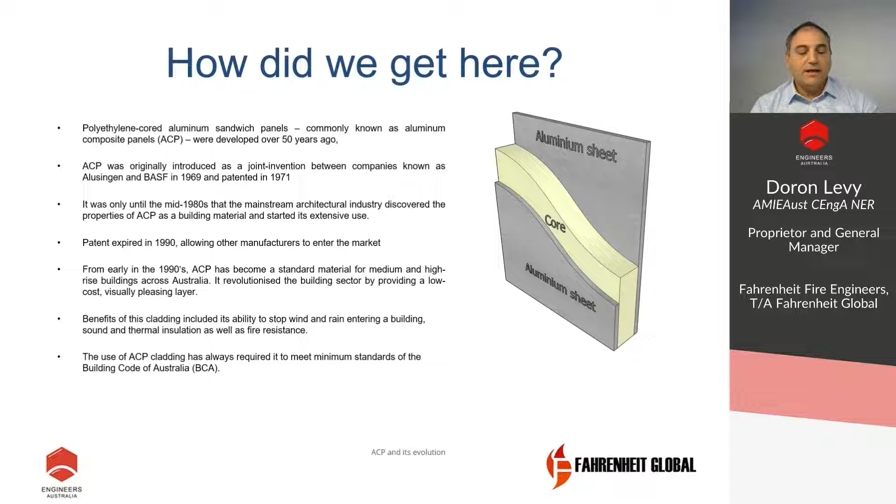It revolutionized the building sector by providing a low-cost, aesthetically pleasing skin or layer that was easy to attach to a building framework. Benefits of this cladding include its ability to stop rain entering a building, sound and thermal insulation, as well as fire resistance.

How did we get here? Aided by changes to the Building Code of Australia by way of the introduction of performance requirements, replacing a blanket ban on combustible materials being used on tall building facades. The timing of the relaxation of the Building Code and the introduction of ACP to the Australian market by multinational companies could be a coincidence.

However, as outlined in my introduction, by the end of the 1990s, there was growing evidence that the performance-based approach to facade engineering was not working. Combustible core sandwich panels were implicated as contributors to serious injuries and deaths.

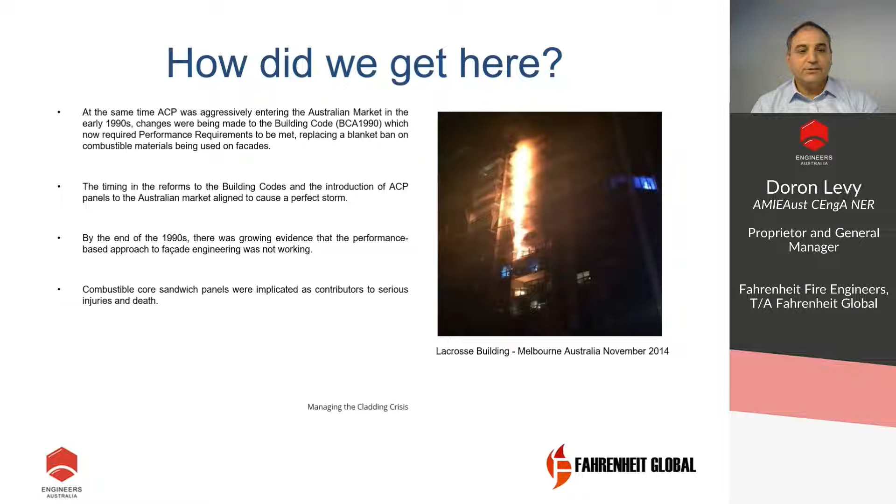In the aftermath of the scores of flammable cladded building fires from around the world, questions are now being asked regarding the viability of cladding and the potential impact across Australia, given a significant increase in multi-dwelling developments. In response, on September 6, 2017, the Australian Senate Economics References Committee released its interim report on aluminium composite cladding, which included the following 8 recommendations.

1. The Australian Government implement a total ban on the importation, sale and use of polyethylene core aluminium composite panels as a matter of urgency. 2. The Commonwealth Government work with state and territory governments to establish a national licensing scheme with requirements for continued professional development for all building practitioners. 3. The Building Ministers Forum give further consideration to introducing nationally consistent measures to increase accountability for participants across the supply chain. 4. That the Commonwealth Government consider making all Australian standards and codes freely available.

5. The Commonwealth Government consider imposing a penalty regime for non-compliance with the NCC, such as revocation of accreditation or a ban from tendering for Commonwealth-funded construction work, with substantial financial penalties. 6. The Commonwealth Government ensure that the Federal Safety Commissioner is adequately resourced to ensure the office is able to carry out its duties, in line with the new audit function and projected workflow.

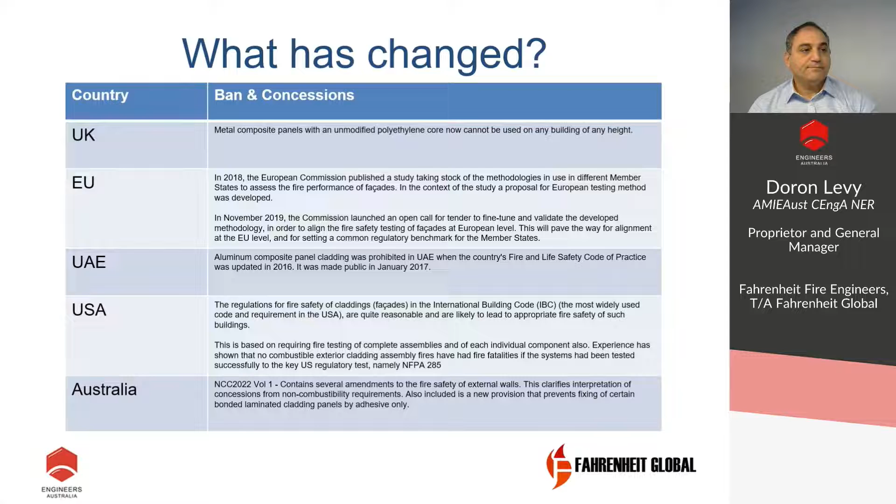The NCC 2022. This will be discussed in greater detail in the next presentation by Cathy Inglis. So stay tuned for that one. It'll be interesting. States and territories agreed to delay the adoption of the National Construction Code, the NCC, BCA 2022, until 1st of September 2022.

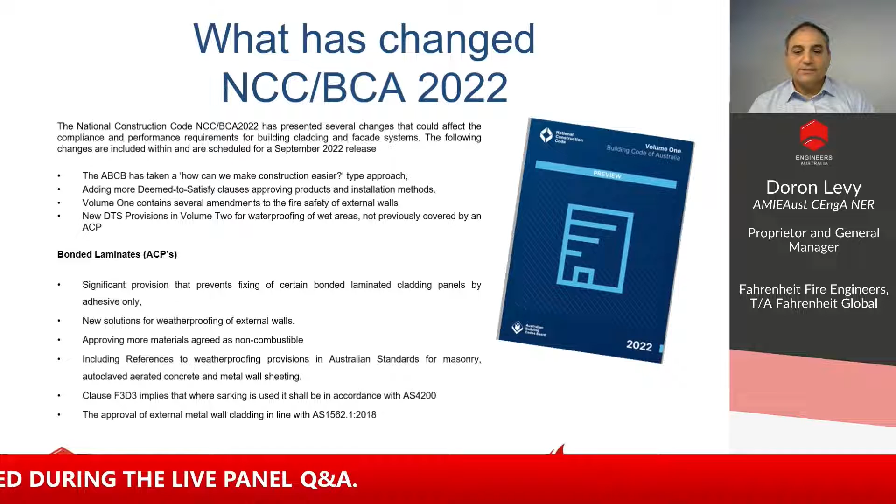Fire safety of external walls. Volume 1 contains several amendments to the fire safety of external walls. This clarifies interpretation of concessions for non-combustibility requirements. A new provision that prevents fixing of certain bonded laminated cladding panels by adhesive only. Waterproofing. The new DTS provision in Volume 2 for waterproofing of wet areas, not previously covered by the ACP.

Weatherproofing. Volume 1 contains additional DTS provisions providing new solutions for weatherproofing of external walls, including references to weatherproofing provisions in Australian standards for masonry, autoclaved aerated concrete, and metal wall sheeting. To the best of my knowledge, the 2022 version of the National Construction Code has presented numerous changes that could affect the compliance and performance requirements for building cladding and facade systems, as well as other construction materials and methods.

In reviewing the draft NCC 1, I note that the Australian Building Code Board have taken a how-we-can-make-construction-easier type approach by significantly adding more deemed-to-satisfy clauses, approving products and installation methods. Unlike previous codes, which were ultimately based on performance-based solutions to meet the performance requirements. For sarking, for instance, the change to clause F3D3 implies that where sarking is used, it shall be used in accordance with AS 4200.

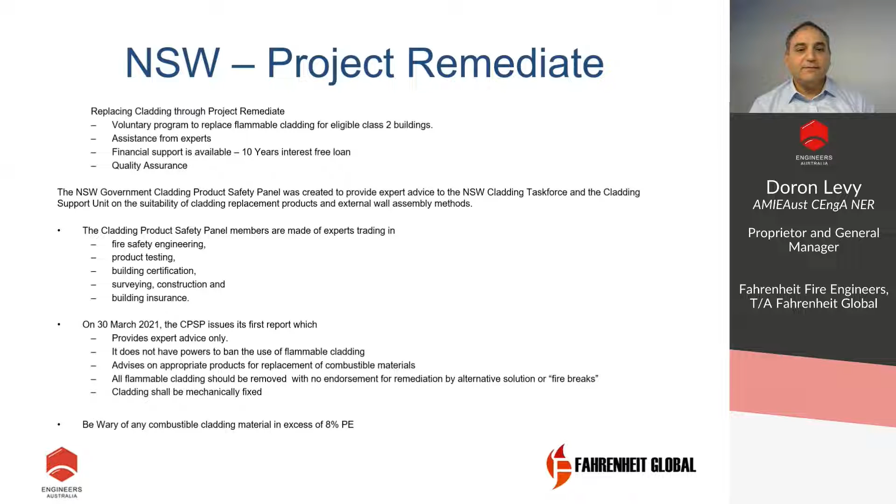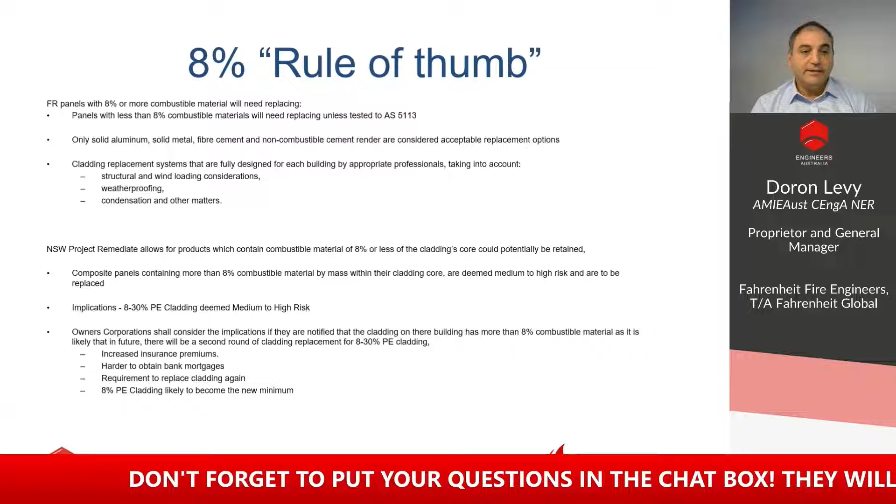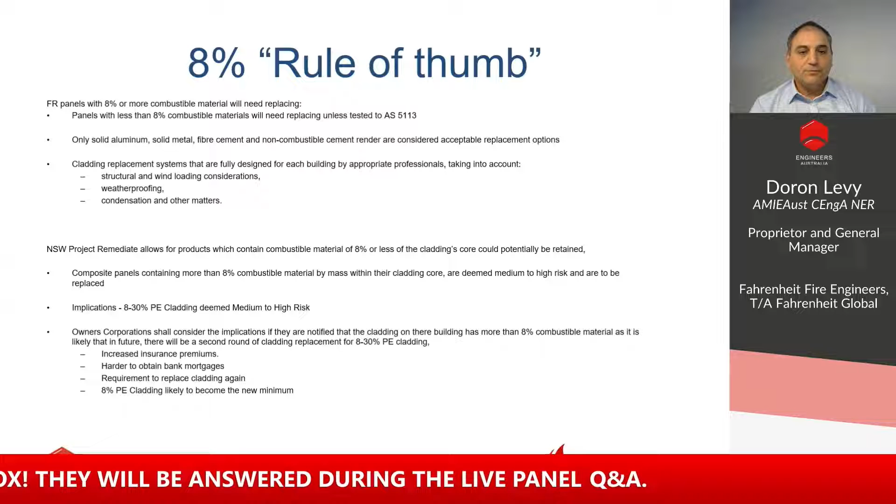The 8% rule of thumb. Composite panels containing more than 8% combustible materials by mass within their cladding core, such as polyethylene, PE, core, are deemed medium to high risk and need to be replaced. FR panels with 8% or more combustible material will need replacing. Currently, the New South Wales product ban is only applicable to panels with combustible material of 30% or greater.

It is likely that in the future there will be a second run of cladding replacement for 8 to 30% PE cladding. Therefore, owners corporations with such cladding may need to make financial provisions for its replacement. Owners corporations with 8 to 30% PE cladding are likely to be slugged with increased insurance premiums and possibly even difficulties obtaining insurance coverage, due to the Insurance Council of Australia deeming such cladding medium to high risk.

Potential buyers of such apartments with cladding of 8 to 30% PE may be unable to obtain bank mortgages for such purchases, creating a problem for existing lot owners who are looking to be able to sell. Owners corporations that have already replaced extremely flammable PE cladding with cladding between 8 to 30% PE, as such claddings are not a banned product under the Building Products Safety Act 2017, may need to again replace the cladding and may look at potential claims against building professionals that advised on the replacement cladding.

Any building professionals who are advising on or undertaking cladding replacement should be aware that 8% is likely to become the new minimum PE percentage for cladding in the future. Only solid aluminium, solid metal, fibre cement, and non-combustible cement render are considered acceptable replacement options, subject to bespoke design requirements. Panels with less than 8% combustible materials will need replacing unless tested to AS 5113.

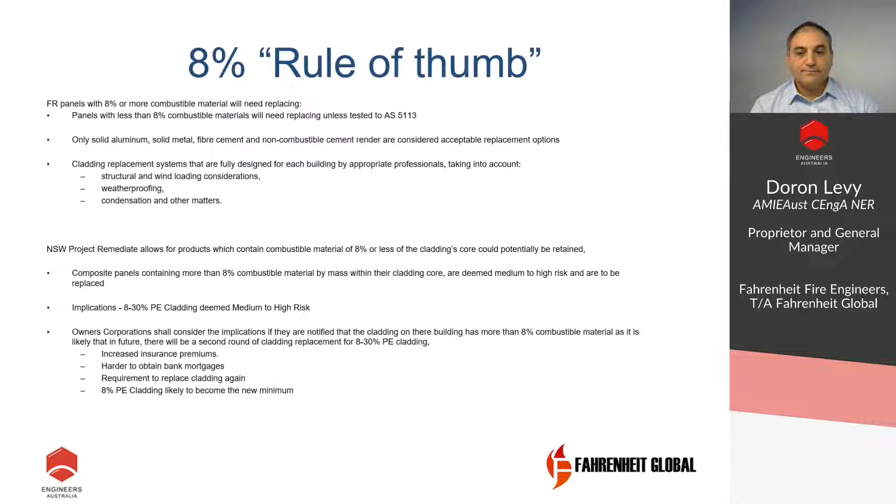What has changed in Victoria? A ban on cladding deemed by the Victorian government to be high risk came into force in February 2021 in a bid to reduce high fire hazards. Multi-storey developments will not be able to use flammable aluminium composite panels or rendered expanded polystyrene. Penalties of $80,000 will apply to individuals and up to $400,000 for building companies.

Victoria's Housing Minister wants a national approach to the issue of combustible cladding. Victoria's Minister for Planning announced at the time that flammable aluminium composite panels and rendered expanded polystyrene would be banned for use as external wall cladding for all multi-storey developments in the future. This ban will ensure new developments are built to the highest standard to keep Victorians safe, he said.

The prohibited materials will not be allowed for use on apartment buildings, hotels, aged care facilities, and other residential buildings with 2 or more stories. The ban also applies to office buildings, retail premises such as shopping centres, warehouses, factories, and car parks with 3 or more stories. ACP can be used if they have a core of more than 93% inert mineral filler, the 8% rule.

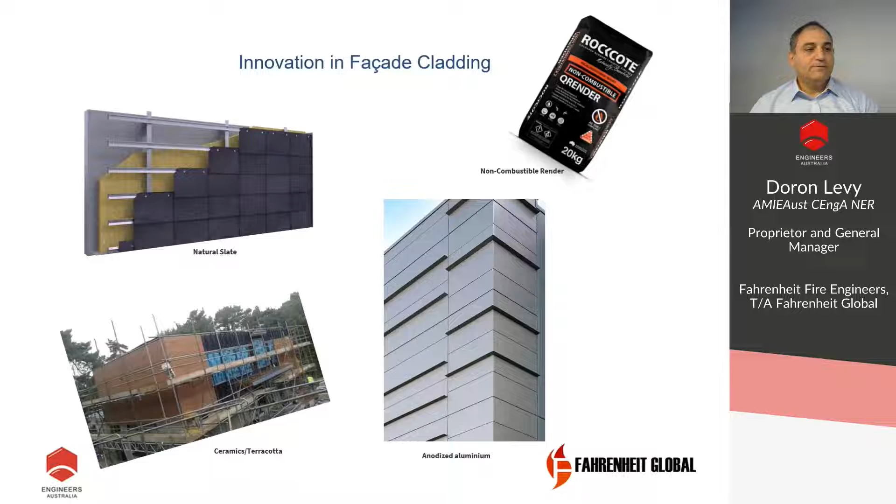Obviously, there's a lot more information on this topic on the EEA website, which I recommend looking into. It goes into details of cladding remediation Part A and Part B of Project Remediate.

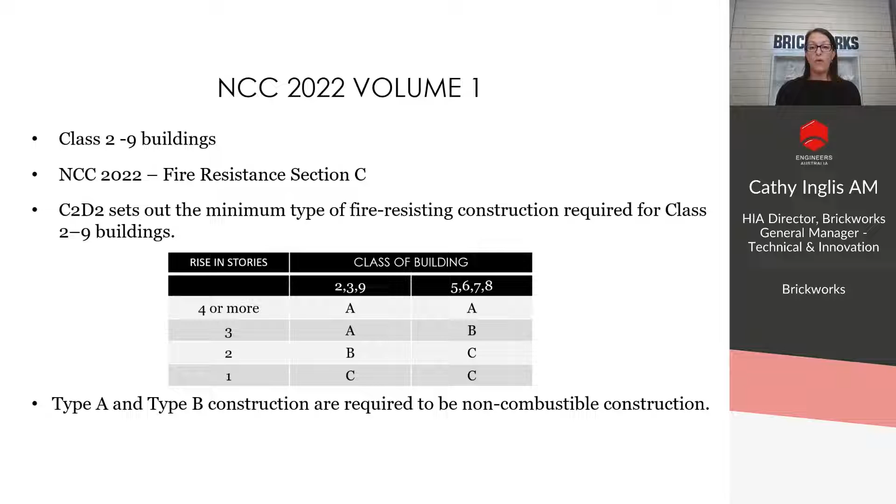But essentially now, I'm going to talk about what's coming in the 22 version of the NCC. So the NCC 2022 Class 2 to 9 buildings, it's covered fire resistance in Section C, and the clauses now have all been renumbered. So I've got some examples to show you the clauses. So C2D2 sets out the minimum fire resisting construction for Class 2 to 9 buildings based on the number of stories in the building, to whether they're Type A, Type B or Type C construction. So Type A and Type B are required to be non-combustible construction.

So in Part C1 fire resistance, in 2019, the performance measure CP1 was a building must have the elements which will, to the degree necessary, maintain the structural stability during a fire. So now in NCC 2022, this is now a functional statement. So the NCC is broken into, you've got objectives, you've got functional statements, and then you have the performance requirement. So the functional statement, in 2022, is a building must be constructed to maintain the structural stability during a fire to allow the building occupants to escape, to allow for fire brigade intervention and avoid damage to other property.

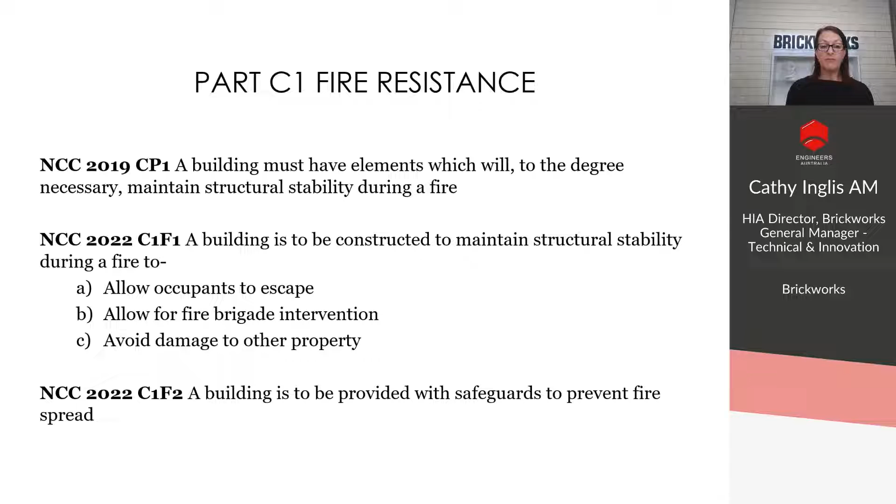The functional statement 2 is a building is to be provided with safeguards to prevent fire spread. And that's one we're going to go into a bit more detail about. So preventing fire spread during a building fire, it's related to a whole lot of things. And you can see the list there.

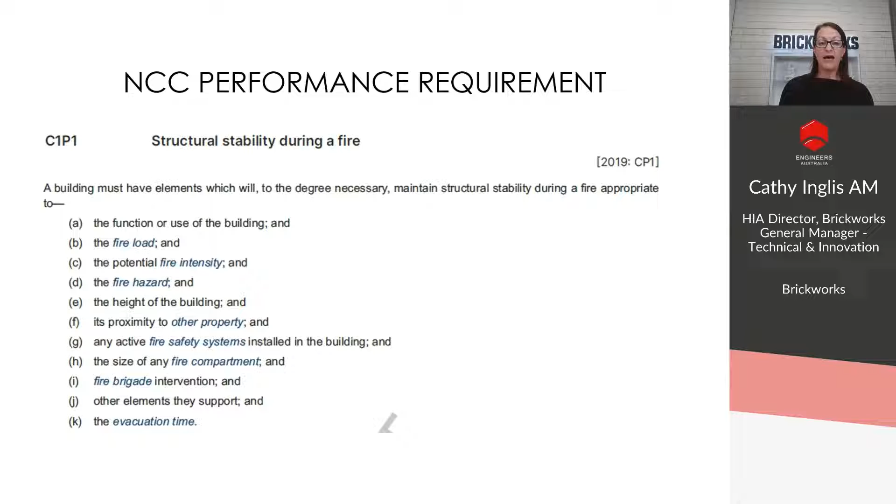So it must have elements to the degree necessary to maintain the structural stability, which is appropriate to the function of the building, the fire load, the size of the building, and all those things need to be taken into account when working out if your building will meet that performance requirement. So performance clause 2 is to prevent the spread of fire.

So a building must have elements which will, to the degree necessary, avoid the spread of fire to exits, to sole occupancy units and public corridors, and in a building and between buildings. And this is, again, appropriate to the function of the building, the fire load, the number of storeys, the proximity to other properties, and that list of elements there.

In the new 2022 NCC, you'll see this is a snippet out of the preview draft of the NCC. The final version will be released soon and then comes into effect from the 1st of September, depending on the states, each state authority and when they call up the things.

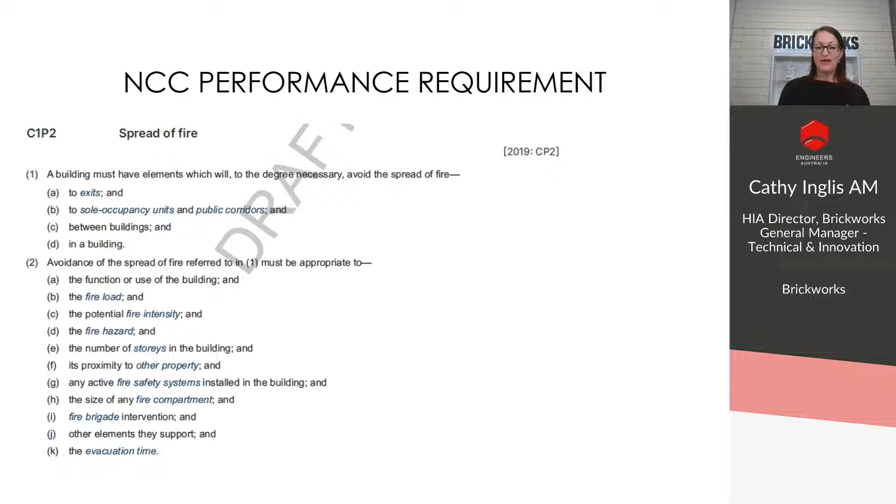But you will see there's a little box on the right which says 2019 CP2. So with them renumbering all the clauses in the NCC, they have put that little number of what the clause used to be in the previous version, so you can go back and you can see what's changed. But a lot has changed in this space.

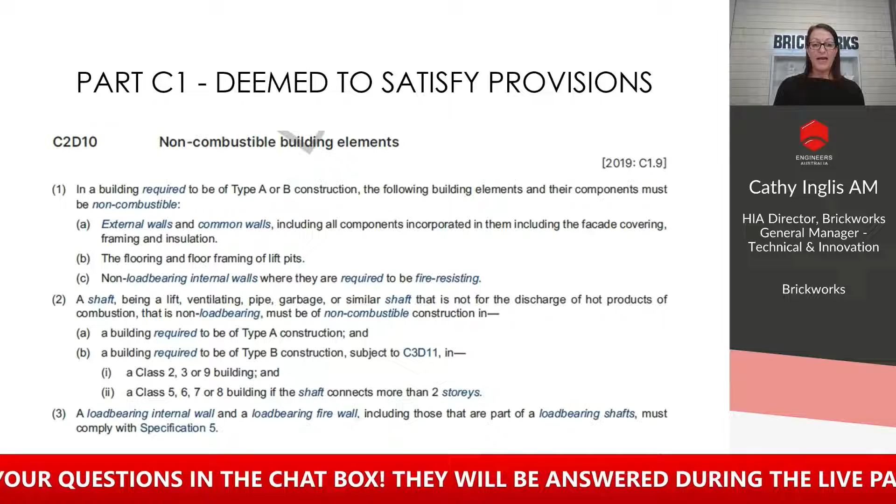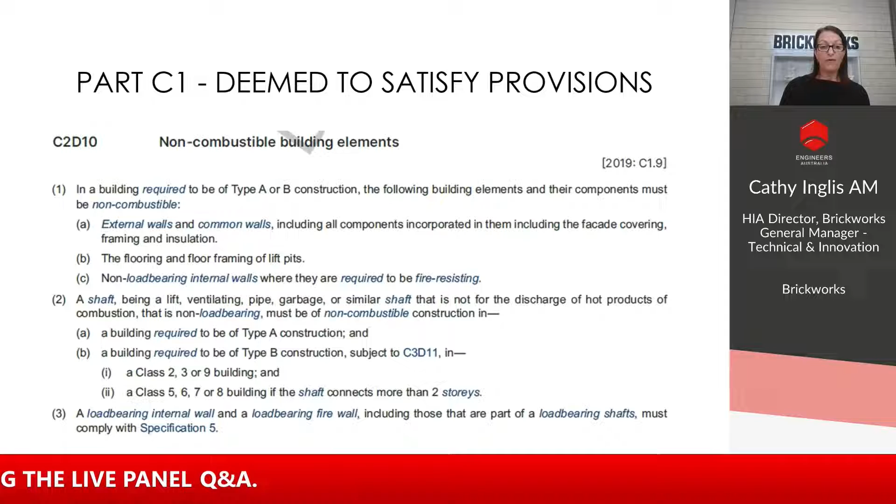So the deemed-to-satisfy provisions that are in the fire section for C2D10 is the non-combustible building elements. And these are the deemed-to-satisfy provisions. So this is where a building of type A and B must have the following elements, and all their components must be non-combustible for external walls, for common walls, for flooring and floor framing of lift pits, and non-load-bearing internal walls that are required to be fire rated. And then it goes on to shafts and other things.

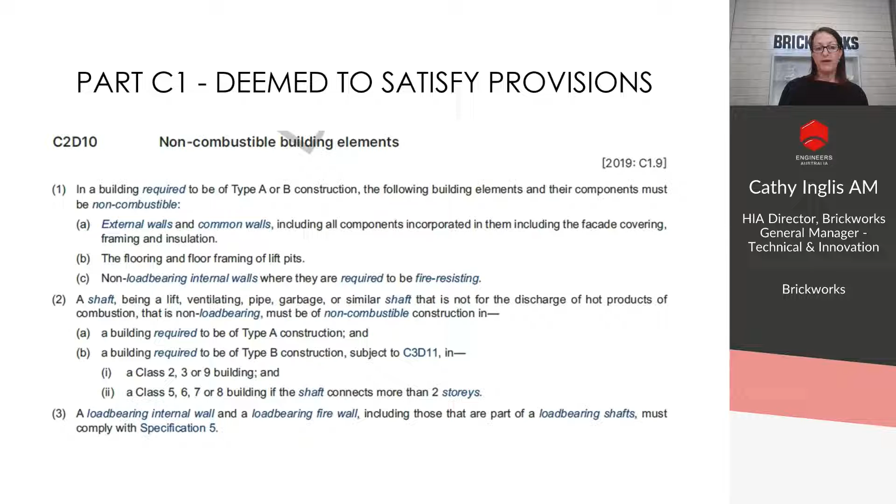But specifically, we're talking about external walls, so we'll focus on that. So that's the requirement. And that was the previous clause C1.9. So what's new? Now, I know this is quite small. You might have trouble reading it. But this is what's new in the list of what building auxiliary items are allowed, and they've added to this list with a whole lot of new things.

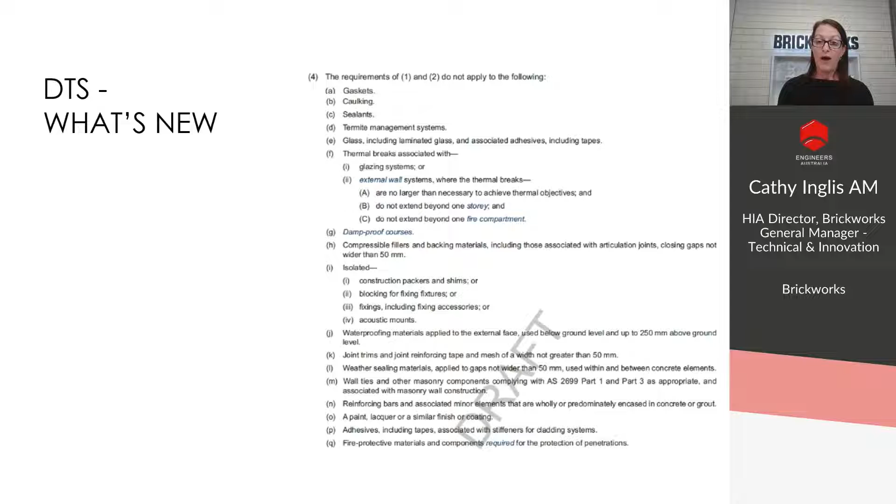So previously, that first clause, they must be non-combustible for external walls, there were only several things that were exempt: gaskets, caulking, sealants, termite management systems, glass, and damp-proof courses. The rest of this list, it now goes down to item Q, have all been added. So this now adds things like thermal breaks, compressible fillers, waterproofing materials, paints, adhesives, packers. They're all listed there now as elements of your facade that are not required to be non-combustible.

And what else is new? They've finally added in a list of materials that are non-combustible and they can use where you need to use a non-combustible material. So this has added concrete, steel, masonry, aluminium, AAC, and the list goes on: terracotta, porcelain, ceramic, stone, zinc, lead, bronze, brass. So they're all known non-combustible materials.

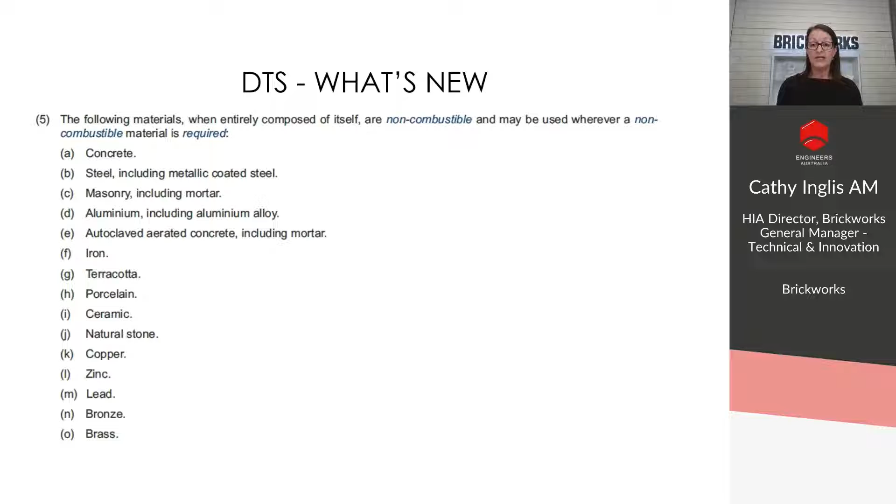But in the past, we always had the issue that because these weren't listed, people were asking for non-combustibility testing of a brick or of concrete or of terracotta tile. And we know those materials, they're known non-combustible materials. So it's great that the Australian Building Codes Board has recognised that, and these are now included as exempt items and can be used wherever a non-combustible material is required.

There is still the list of materials that can be used where a non-combustible material is required that have limited or low combustibility. This is the same as the previous version, and these are plasterboard, fibre cement sheeting, and bonded laminates with the requirements of the bonded laminate, the thickness of each layer and the maximum adhesive layer, and that you've tested it to spread of flame and smoke development indexes.

So that clause essentially hasn't changed, except the only thing they added there, bonded laminates, when they're used externally must be fixed in accordance with C2D15. So this requires mechanical fixing of bonded laminates to the external facade. They can't be adhesive fixed. So that's a new addition to that clause.

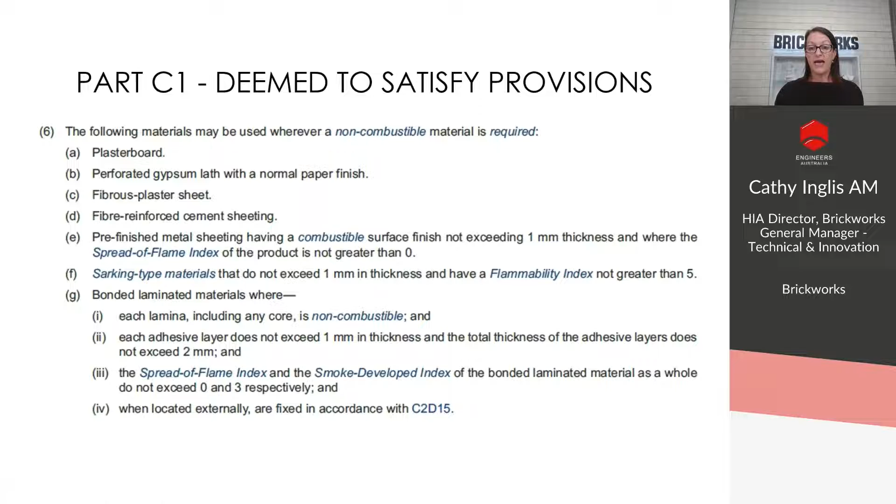So to meet the performance requirement of C1P2, the building must have elements to the degree necessary to prevent the spread of fire in a building. The compliance pathways to meet this are a performance solution, the deemed to satisfy solution, or a combination of both, as you do with all clauses in the NCC. So first we look at if you'd use deemed to satisfy.

So deemed to satisfy, I showed you before the deemed to satisfy clauses. This means you can use a known non-combustible material from that list, which is deemed non-combustible, or you can have a test of non-combustibility to AS 1530 Part 1 that demonstrates that your material or product is non-combustible. Or you can use a product that is deemed non-combustible from that list of products with low or limited combustibility. So that's using the deemed to satisfy method.

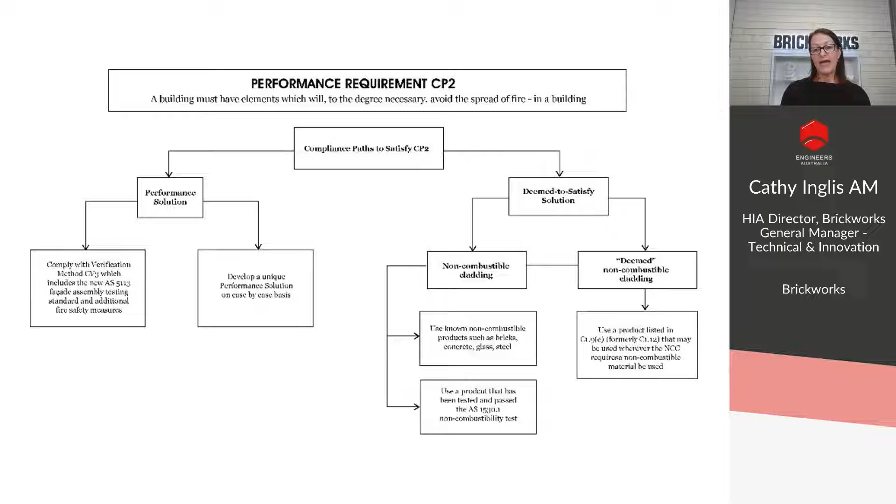If you want to use the performance solution, you can develop a wall system and use a verification test method using C1V3, which tests the wall facade to AS 5113. Or you develop a custom performance solution for the specific project and the system you want to use. So then you look at the testing and what it means and what it looks like.

So non-combustibility testing to 1530 Part 1 is essentially taking a small part of your product right through the product. So it's 50 mils diameter, about 50 mils deep. It's got a small core in the centre where a thermocouple's placed, and it's sat in a little wire basket, and that is lowered into a furnace. You can see on the image on the right, there's a mirror at the top that shows the red hot inside of the furnace. The sample on the left shows the basket, and it's lowered into the furnace. And the temperature of this test is 750 degrees.

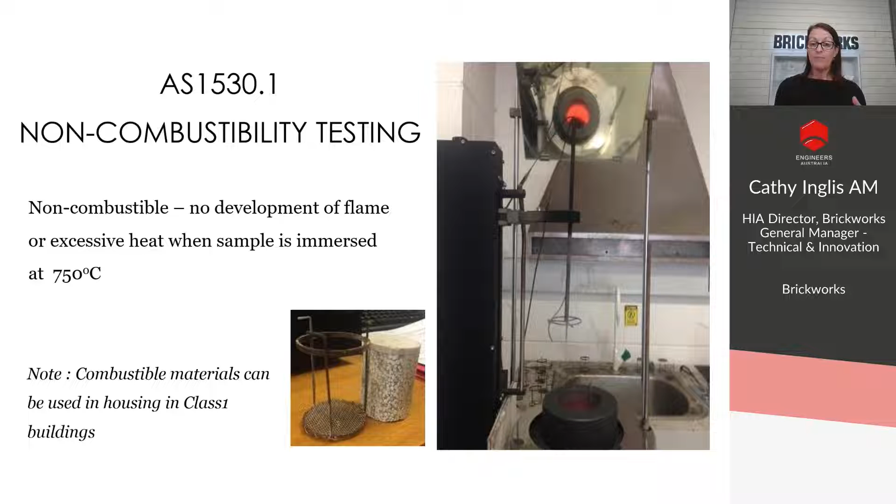So a material is declared non-combustible if there's no development of flame or excessive heat when the sample's immersed at that 750 degrees. So materials that do have some combustible components in them can still pass this test. If you look at that little sample there, you might see it's got expanded polystyrene as a lightweight aggregate in it. And that actually passes the test because as it's lowered into the furnace, the very exterior polystyrene volatilizes before it's dropped into the furnace. The rest of it is then protected by the cement matrix of the product. So it then doesn't sustain a flame and doesn't exceed the temperature required. So there can be combustible components in a product that will still pass the test because they're protected by a cement matrix or some other means.

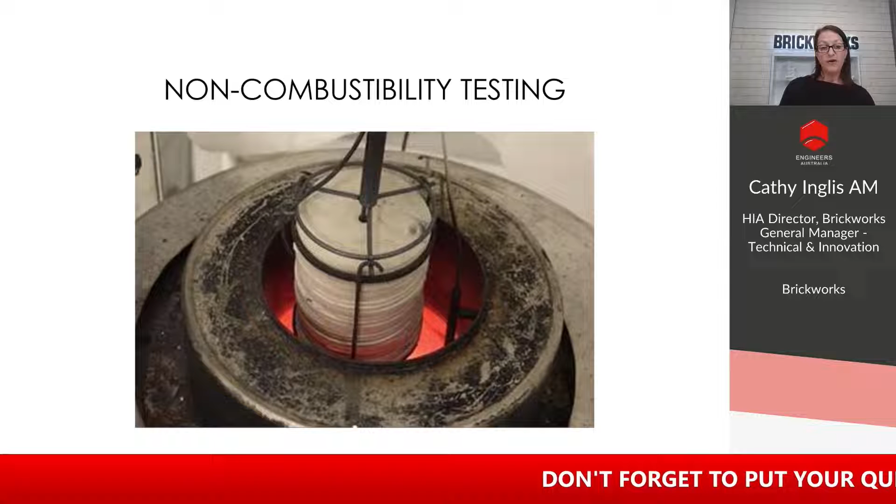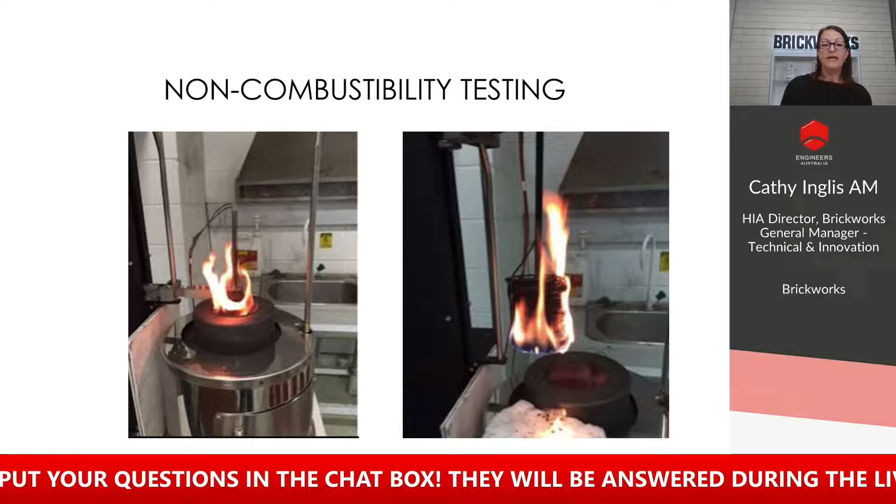So you can see here the sample actually being dropped into the furnace. If your sample is thinner than the depth of this, you cut layers of it and build it all up to make it to the 50 mil height that it needs to be for the testing. And then finally, when it's dropped in, you can see this is a product that's failed and it's sustained a flame. It's been dropped in, it's caught fire, they've brought it out and it's still sustaining a flame. So that would be a product that would fail the test.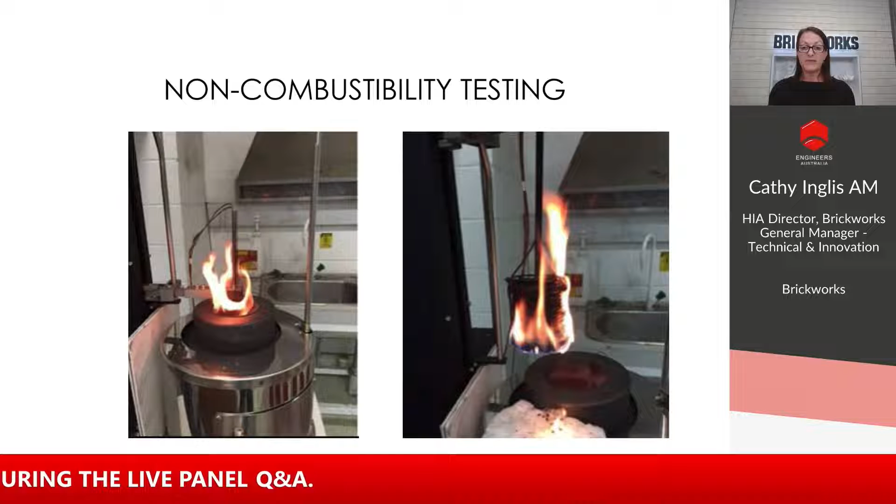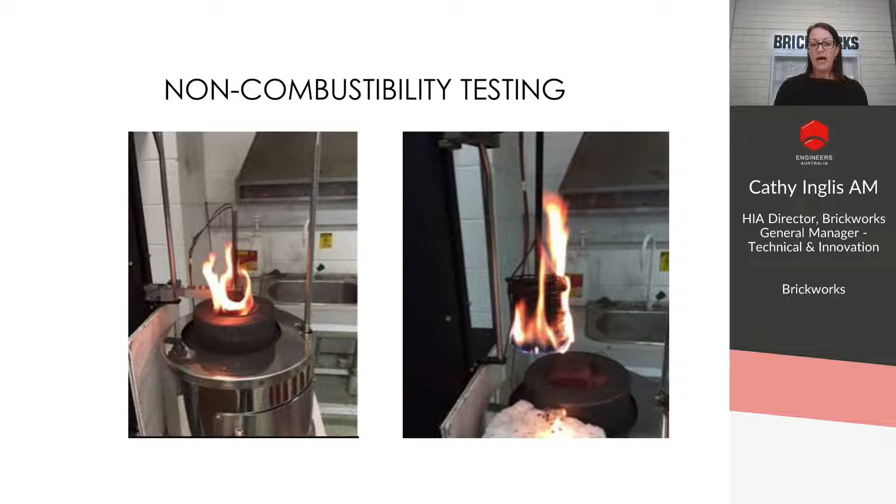It's quite a simple, easy test, but it has its limitations, particularly with multi-layer products and multi-compositional products, in how you actually test it. And that's probably where using 5113 becomes a little more useful if you've got a product that can't be tested using this system.

And once it's tested, you'll get a test certificate, and they can look very different. But essentially what the test certificate will declare is if there was a sustained flame, what the rising temperature was over the time the sample was immersed, and it will declare them as deemed to be non-combustible. The examples there show one from CSIRO and from Exova Warrington.

So another way to demonstrate if you're doing a performance solution is to use the verification method C1V3, which is fire spread of external walls. This uses the external wall performance test, which is Australian Standard 5113. So to get a wall to meet this verification method, you test it to that standard, and it's got to achieve a classification of EW, which means it's an external wall classification.

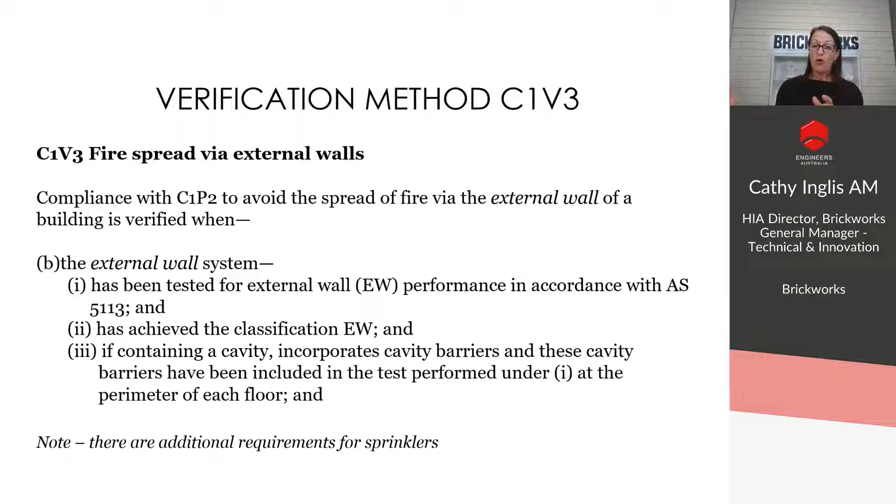If the wall has a cavity and incorporates cavity barriers and they've been included in the test, they must then be used. And if you use this test as a verification for a performance solution, you actually have to build the wall exactly as it's done in the test method. There's no variation to it. If you want to vary it, then another test would be required to demonstrate that the build-up system layers you've put in your whole wall will be able to pass the EW rating.

So this test was introduced in the amendment in 2016 as a means to comply for non-combustibility, and essentially it's the fire propagation testing to classify external walls of buildings. So I'm going to show you a bit about the test. It's essentially a wall that's nearly 10 metres tall. At various heights of the wall, there's a series of thermocouples to measure temperature, not only at the various heights, but also through the depth of the wall.

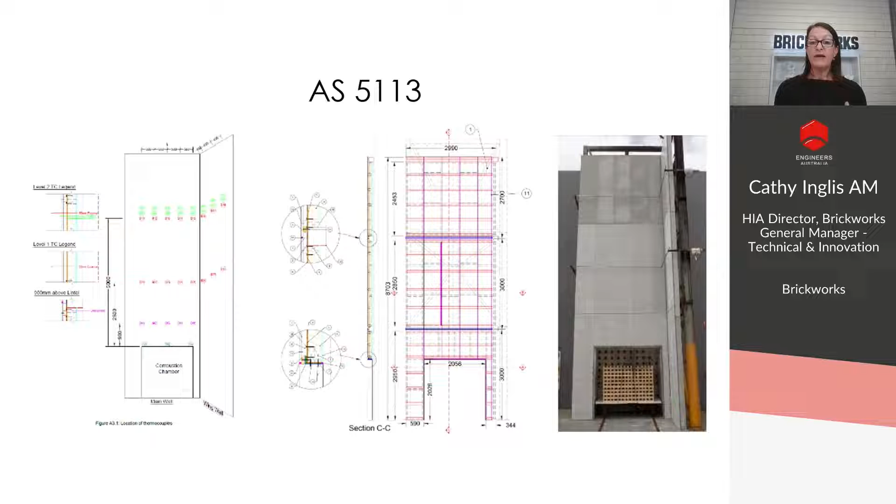So you have a series of thermocouples to measure the temperature at not just the external face, but also through the layers. So through your insulation, through your frame, right through to whatever your internal lining is on the inside of your wall. When the wall's finally built, you can see in the far right picture, there's a crib of timber put in there that's set alight that is your fire source for the test.

So once the fire's lit, you can see that it continues on until they test it for the period of time necessary till the timber crib falls over and the fire goes out. So the wall test also has a wing wall. We know that the way that walls intersect and having a wing wall will affect how the fire goes. So that's why this test is done with a wing wall. You can see, apart from smoke damage, there's very little damage to this wall.

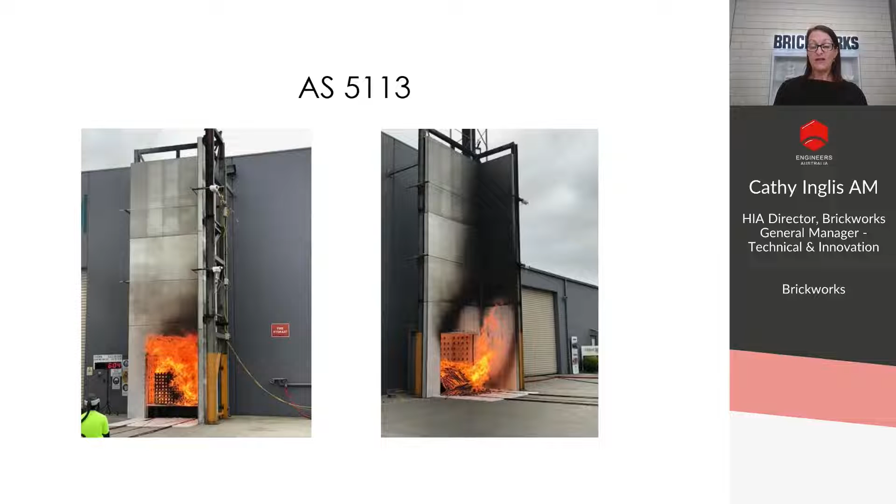And this wall was a test done on a cladding board product that was actually deemed already non-combustible because it had passed 1530 Part 1. So this was done just as an experiment to show that if you've passed 1530 Part 1, this product actually passed this test for 5113. And to pass 5113, there are 9 criteria that you have to pass, all of them, to receive the

EW rating. So this is related to the temperature at a certain point after a certain time, so the first one at 5 metres, you've got to be less than 600 degrees to pass it. And it goes on up the different heights; you must have no flaming, there must be no opening of the cladding, no spread beyond the specimen, and also no flaming debris, and the debris mass is limited to 2 kilograms.

So once you pass all of those, you get an EW rating, and then that wall system, as built, can be used to demonstrate compliance to the performance measure that the building must not spread fire. In addition to that, if you use that as a verification, you also have to add in the NCC additional sprinklers, and there's a few other requirements if you use that as your verification method.

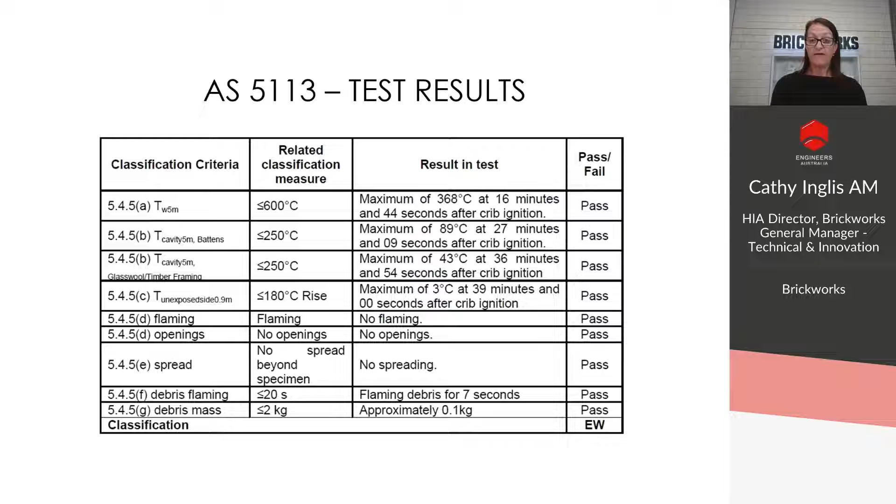So just to show you an example of the post-test image of the wall, you can see on the far left, the fire's gone out, the crib's been totally removed, and you've got some smoke damage on the wall. When the cladding boards were taken off, you can see there's brown staining on the wrap from the heat of the fire concentrated in that lower area. But when the wrap's removed, you can see there's no damage to the insulation or the frame behind that.

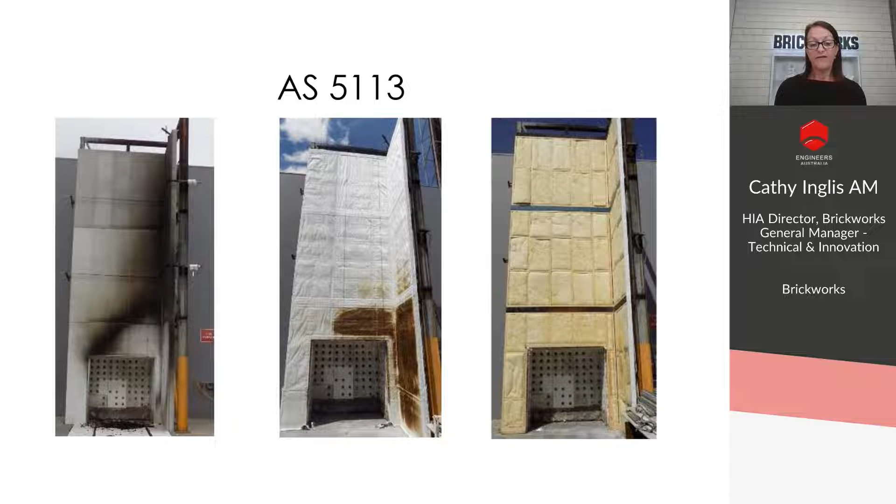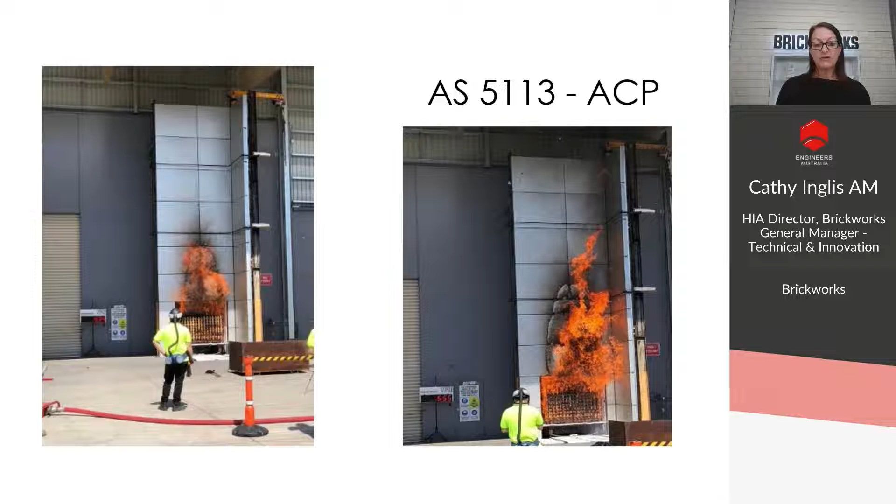So as a comparison, I'm just going to show you some examples of what an aluminium composite panel looks like in one of these tests. I'm sure some of you have seen this before. If not, there's plenty of images, some on LinkedIn and some on Google. But essentially with a polyethylene core, you can see at 5 minutes, which is the photo on the right, the flame's already up and you can start to see the aluminium starting to shrink and melt away.

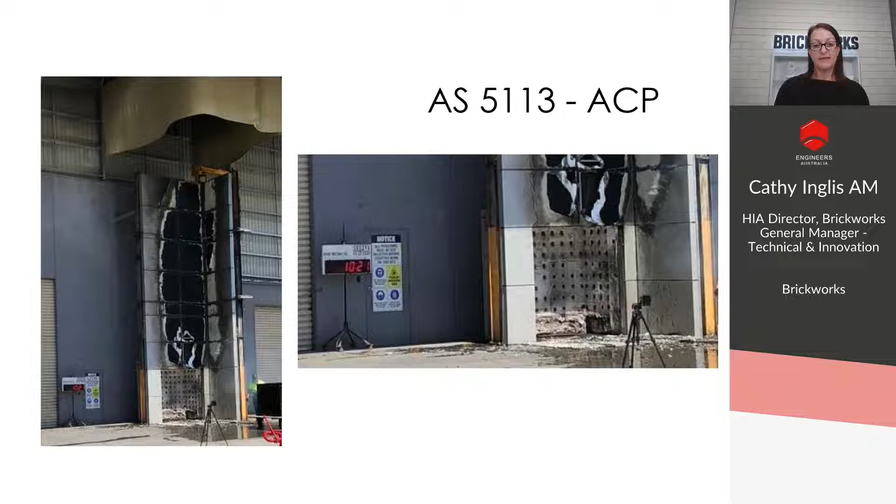And finally, that's what it looks like after the test. And that test was stopped at 10 minutes and 21 seconds. And that's how much damage was done to the wall. So that's the significant issue with the composite panels.

So just looking at some other 5113 tests to show you how other materials perform. So this is a test of fibre cement boards. These are 9mm fibre cement boards that are actually allowed to be used for external cladding. These have an exemption in the limited combustibility list in the NCC that you can use them. I don't think these products should be used for external cladding if they can't meet the 1530 Part 1 test or pass the 5113 test.

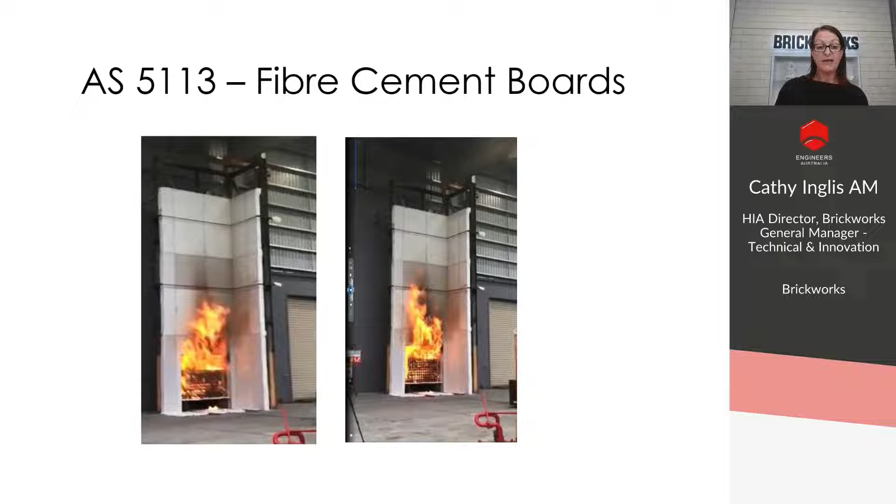Because what you can see here is that here's the initial photos of the boards on fire. This is what it looked like when the test was stopped at about 14 minutes. And you can see the significant damage to the fibre cement boards on the left-hand side. The photo on the right-hand side is during the test and the back of the wall. It's a bit fuzzy because you can't get close to it because of the fire.

But when you blow it up, you can see that the fire's actually come through the fibre cement, through the frame and insulation, and is coming right through the plasterboard lining on the rear, which is the inner surface of your wall facade. So this product's allowed to be used, but it can't pass 1530 Part 1 tests or the 5113 tests.

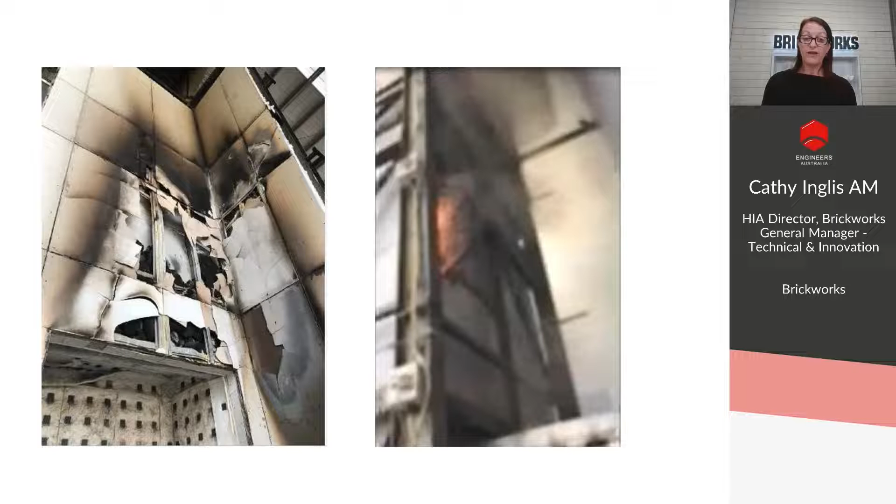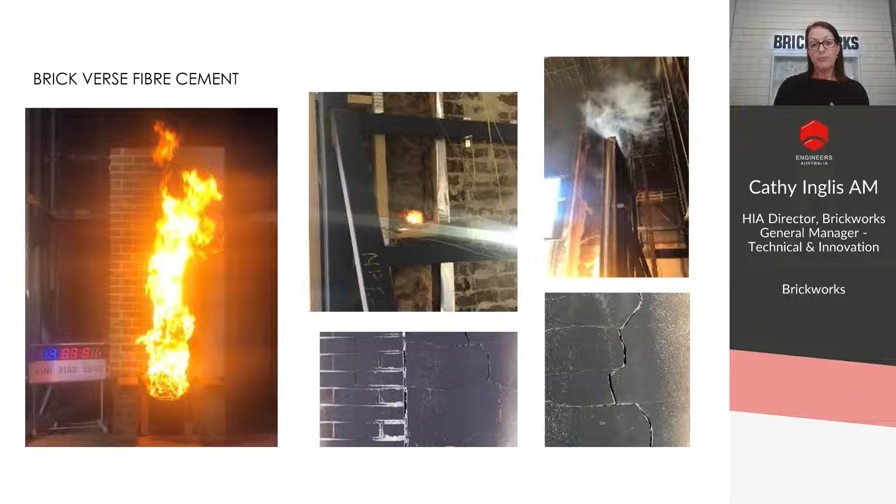Just to show you some close-up examples of what the fibre cement can look like. This was some more simulated tests on a small scale showing a 5113 test with brick versus fibre cement, and that at the end of the test there's smoke and staining on the brick wall, but the fibre cement panel has cracked, fallen away, and you can actually see that the image in the middle shows the fire coming through the product right through to the frame and the backing of the wall.

So another way you can demonstrate verification is they've included in the NCC 22, there was a preliminary bid in 2019, but in the NCC 2022, the new fire safety verification method, which is compliance with the performance requirements, is verified when the building is designed in accordance with the fire safety verification method standard, the performance-based design brief, a fire strategy, stakeholder involvement, and the required level of safety.

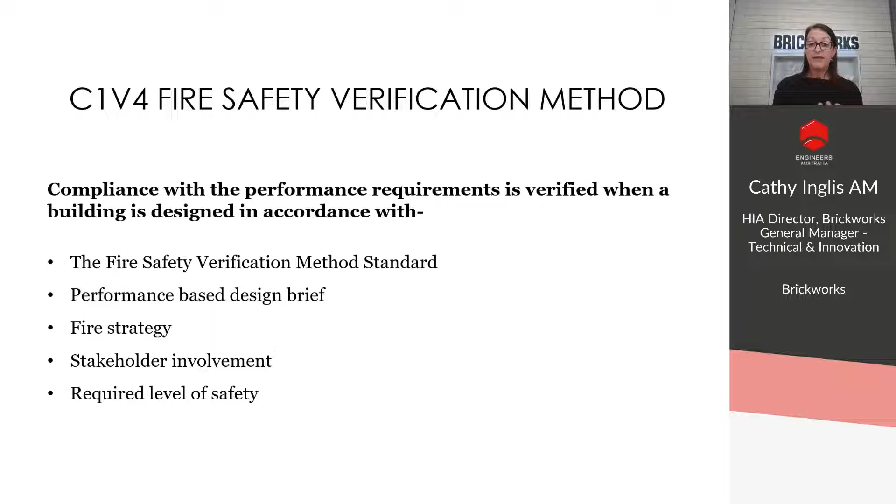Now, I'm not going to go into all that. This is quite an onerous way to demonstrate performance, that you've met the performance requirements, but it is an option to engage a fire engineer and to undertake this work if you've got a custom facade or something else that you can't meet the requirements any other way. This is one way that you can do it. And this involves all the stakeholders doing fire strategies, having essentially a peer review of the documents to make sure that their building will meet those performance measures for fire safety.

So external facades are much more than just talking about non-combustibility, which is what we've covered off today. Obviously, all of that needs to be combined with the appearance of your facade, structural adequacy, serviceability, waterproofing and condensation, thermal and solar transmission, acoustics, sustainability, and durability. So there's a lot of things that need to go together to get the facade right.

And earlier this week, I was at the New South Wales presentation for Project Remediate, which is to remove the cladding materials, the ACPs, off buildings that have been deemed to have combustible claddings. And it's not just the cladding they're finding issues with. There's issues with incorrect materials used for supporting the structures, attachments. There's corrosion of the fixing materials and rails supporting the claddings. There's waterproofing, there's condensation issues. So there's many things that need to be addressed to make sure your facade meets the requirements it needs to do to perform as it should.

So obviously there's some new measures coming into the NCC 22 around energy efficiency and combustibility. That document hasn't been released yet. It's due later in the year after the building ministers finalise what's going in for energy efficiency after reviewing all the RISs, and that will be then included in the 2022 NCC, probably for call up a little bit later. It looks like they're going to give a longer lead time for those measures, for people to get used to them, get them included. So there'll be a bit of a transition time, which is supposed to be announced fairly soon. So all those things need to be looked at.

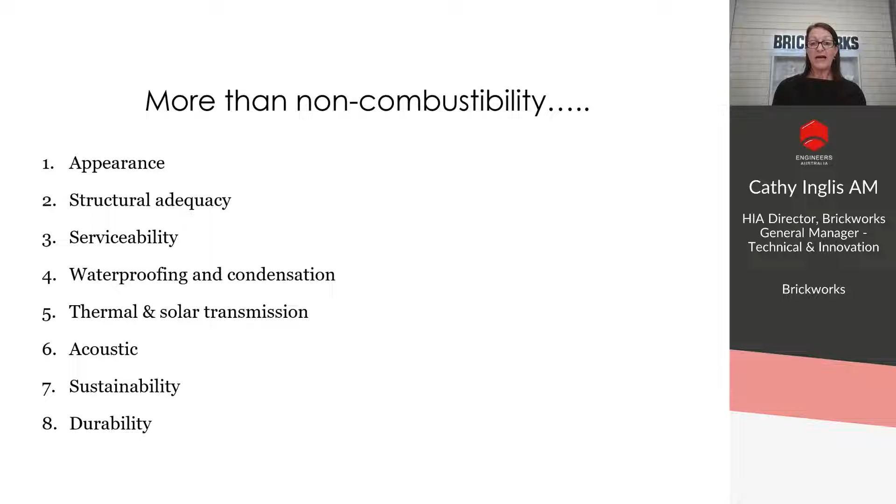So finally, to finish off, I just thought some options when you're looking at non-combustible facades and trying to meet a lot of those requirements. You've got options around ceramic and terracotta facades. And now that they're listed as deemed non-combustible, it's great. You don't have to provide the test certificates, even though we've got them all because we tested them to get through the last few years. So terracotta facades on aluminium or steel hanging systems can meet those requirements of non-combustibility, but also give you durable and long life wall claddings that have virtually no maintenance and will be colour fast forever.

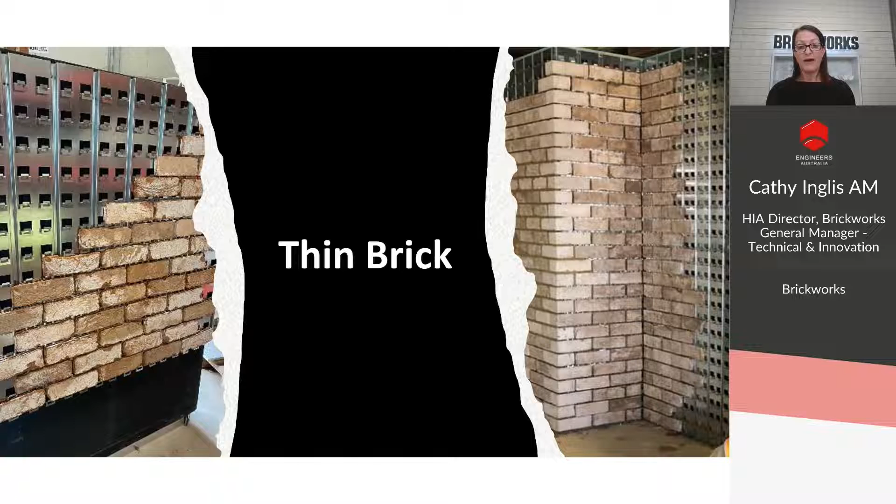Using thin brick on rail systems, this isn't new. It's been around for a while. Brickworks will be launching a brick on rail system later this year, so keep an eye out for that one.